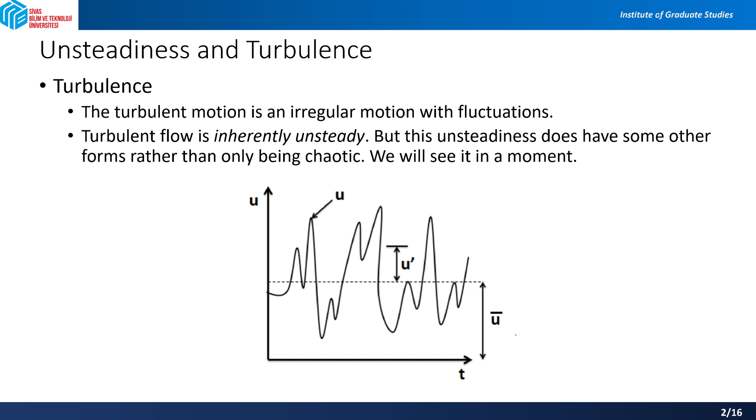So if I want to show it in a proper way, let's say this way, you remember that there was this experiment in Reynolds' laboratory back in the late 19th century, and he conducted experiments with pipe flow by feeding into the stream a thin thread of liquid dye. So this is a liquid dye with a different color.

And for low Reynolds numbers, the dye traced a straight line, like in here. This was a straight line, and it didn't disperse. And with increasing the velocity of the water inside, the dye thread got mixed in all directions, and the flowing fluid appeared to be uniformly colored in the downstream flow. So it started to mix, and then you will have a uniform color.

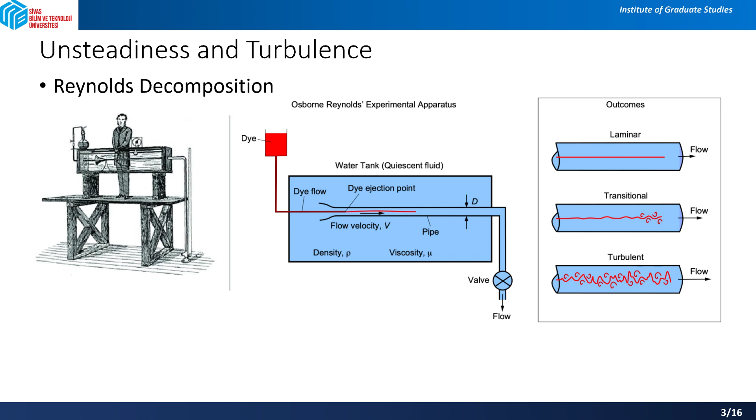And Reynolds inferred that on the main motion in the direction of the pipe axis, so in this direction, the x-axis, there exists a superimposed motion. Okay, this is very important for us because this superimposition will lead us to use the decomposition that we just mentioned there. So he inferred that there is this superimposed motion in x direction all along the main motion at right angles to it. So this superimposing is at the right angle.

So if the main flow is in x direction, you have the y and z direction normal to it. So you have this superimposition in those directions. This superimposed motion will cause the exchange of momentum in transverse direction, and the velocity distribution over the cross section is more uniform than in laminar flow.

That's why you remember in your fluid mechanics that if there is a profile of laminar flow, the fully developed flow like this, for a turbulent motion, the velocity distribution is more uniform, so you will end up with a much more uniform, let's say, turbulent profile. And this description of turbulent flow consists of superimposed streaming and fluctuating, or sometimes we call this fluctuating eddying motion.

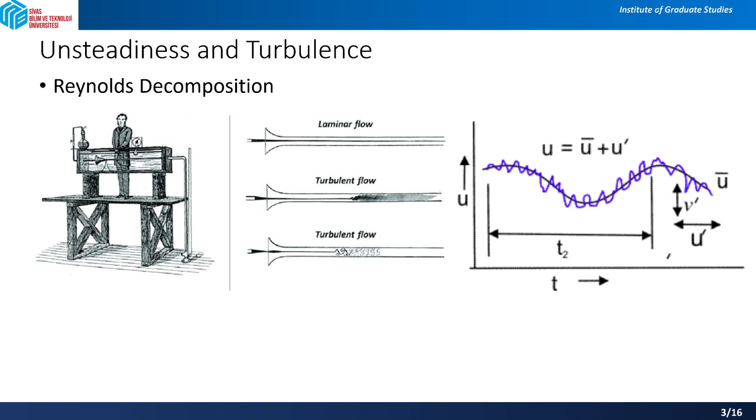So I guess you already remember these from your fluid mechanics and aerodynamics courses, but this is very important for us to see the Reynolds decomposition at first here, and then we will have a triple decomposition in turbomachinery in the next slides. And based on this, actually, what you ended up with was the Navier-Stokes equation. So what was the Navier-Stokes equation?

We said that we have some governing equations, and these governing equations are for your instantaneous velocity. See, this is your instantaneous velocity. So you have u here. So the governing equation for instantaneous velocity is the Navier-Stokes equation. As you know, the Navier-Stokes equation is governing velocity for any fluid flow.

But you do also remember that sometimes when you are engaged with modeling of these equations, you had to make some simplifications. So what are those simplifications? Those simplifications are coming from, as I said, the so-called Reynolds decomposition. So again, please keep in mind that these Navier-Stokes equations are there just to give you the values of instantaneous velocities like u, v, w in the x, y, z coordinate system, and also instantaneous pressure values at each point and at each instant of time, because we said that this is an instantaneous equation.

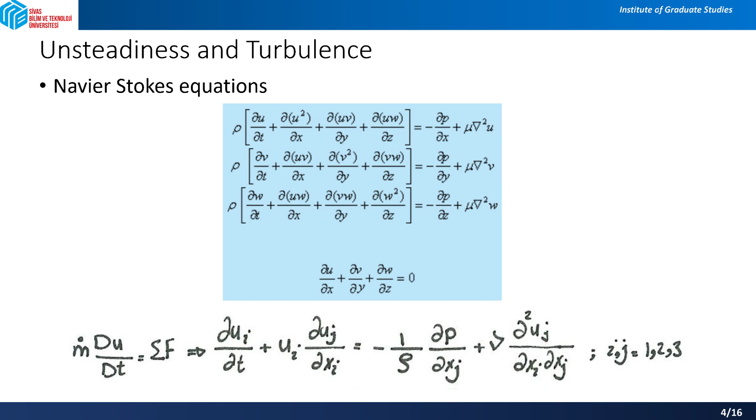And then you have it in a tensorial form. What is the tensorial form? It is pretty important for you to be able to write this Navier-Stokes equation in tensorial form. As in this previous slide, as you can see, the Navier-Stokes equations are three momentum equations and one continuity equation. So these are not written in tensorial form. The tensorial form is this form. So this form is much simpler, right?

We just wrote three lines of momentum equations in one line. This is one line. So what does it mean? We are using tensors i and j here. This is called a tensorial form or Einstein notation. Okay. So instead of i and j, you can put 1, 2, and 3, and then when you put 1, 2, and 3, you will end up with the so-called three momentum equations. And the continuity equation is there.

So the continuity equation in tensorial form, if I remember, is exactly duj over dxj is equal to 0, and j is equal to 1, 2, 3. So if you put j equal to 1, u1 means your u velocity, u2 means your v velocity, u3 means your w velocity, and correspondingly x1 is the x direction, x2 is the y direction, x3 is the z direction. This is just an explanation of how to write the tensorial form. The tensorial form for continuity, we said, is this one.

These additional terms need to be modeled, because these are not something where you can put the values directly inside the mean flow that you are analyzing right now. You are getting the mean flow behavior, but these are not something that you are getting from the mean flow. These are multiplications of, for example, two fluctuations of velocities that then get averaged.

That's why you cannot use these as direct information from the flow, but you have to model these. So modeling this stuff is the whole CFD that we are dealing with nowadays.

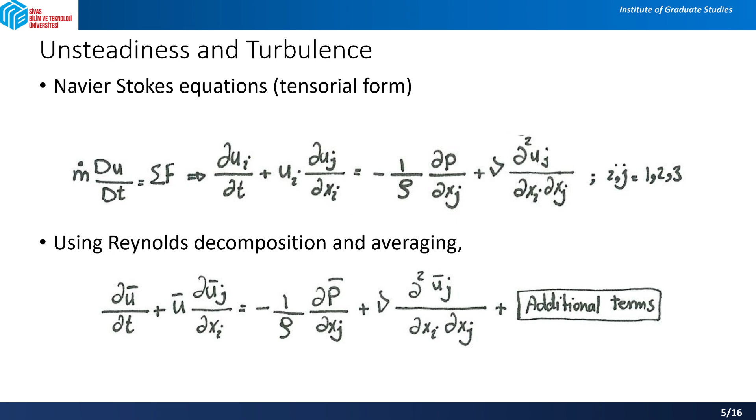We were talking about turbulence. We said turbulence is irregular flow. It is inherently unsteady. But let's look at the unsteadiness of flow inside a turbomachine. You know that a turbomachine is, for example, an axial compressor or an axial turbine or whatever. Whatever it is, it is rotating, right? So when it is rotating, it starts from somewhere.

So when one blade tip is at this point, after one revolution, you will have this tip at the same point. And after two revolutions, you will see it at this very first point. So it means that it is following a sinusoidal wave, right? And this sinusoidal wave in turbomachinery makes the flow unsteady for us. Because the flow is not just behaving like a normal chaotic turbulent flow. It is repeating itself as well.

When it is repeating itself, you can fit a sinusoidal wave to this repetition. And this sinusoidal wave has some characteristics which are known to you. For example, the amplitude of this sinusoidal wave is known to you, right? The period of this sinusoidal wave is known to you. This is a period. The wavelength is known to you.

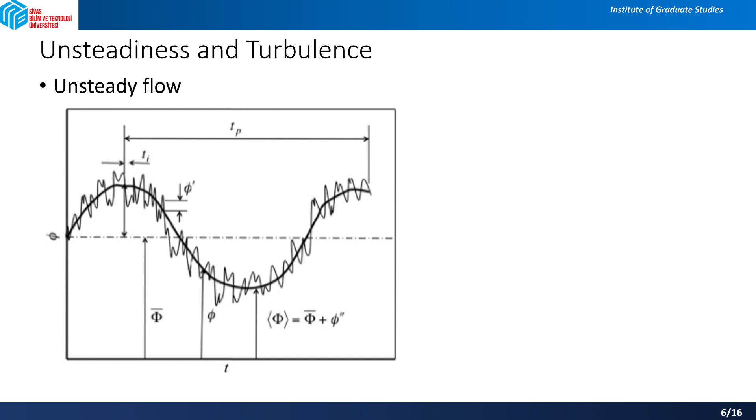For example, if you are measuring just the u velocity, just one component of velocity through time, how are you measuring it? You have, for example, a turbomachine, right? This is the side view of this turbomachine. The flow comes, this is rotating, and the flow goes away from this turbomachine. Suppose that you are putting some device in here, and this device can measure the u velocity for you. So this is you standing and holding this device, and you're measuring the u velocity like this.

What you're seeing is not a fully sinusoidal wave, but some fluctuations also exist over this sinusoidal wave. The same we did with the irregular and chaotic turbulent flow, you can do with this. So at any point, let's say this point, you have your u velocity, which is your instantaneous velocity, the velocity at that instant of time. The time instant is ti. At ti equal to some seconds, you are measuring your velocity with this device, and this is that velocity.

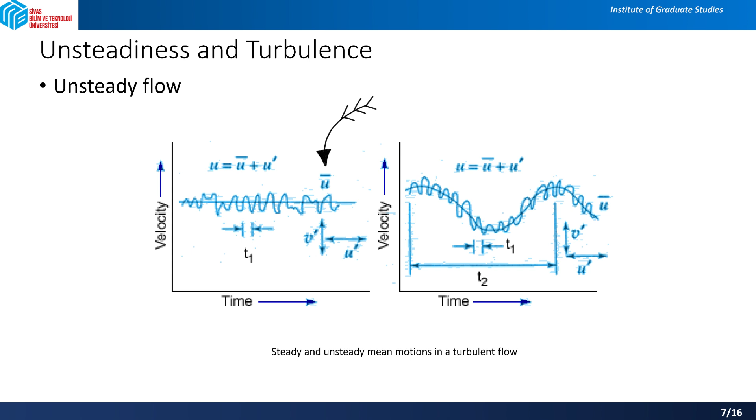So based on this, I can write my instantaneous value as my mean value plus some fluctuation. And my mean value is also composed of another mean plus another fluctuation, u double prime. This u double prime is what we call deterministic fluctuation. Why do I call it deterministic? Because we can determine the changes, as it follows a certain period or frequency. From here to here is one period. When you can fit it into a sinusoidal wave, it has a certain period, a certain frequency, a certain amplitude. That's why we call it deterministic. You can determine these values.

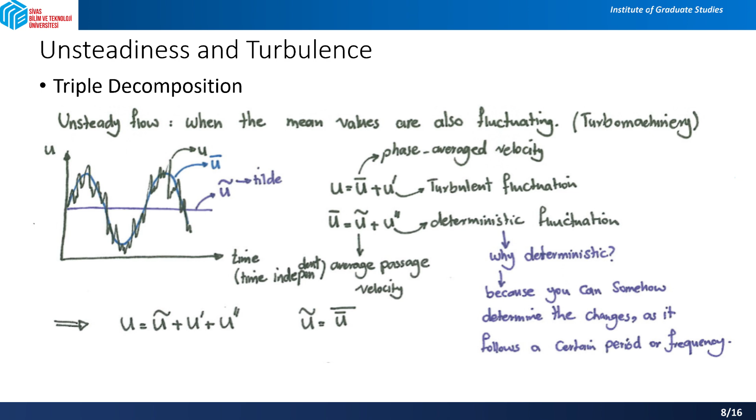So overall, your instantaneous velocity is u tilde plus u prime plus u double prime. So what is u tilde? You remember u tilde was the average of the average. The average of the sinusoidal wave will give you a completely horizontal value. This is better shown in here.

We said that because we have some non-linearity, we have extra unsteady stress terms. These extra unsteady terms are generated in flow equations when you do the time averaging. You do the time averaging over u prime and you get u tilde. These stress terms are similar to the Reynolds stress terms generated by turbulence, but in the cases of interest, they are generated by periodic unsteadiness in turbomachinery. These periodic unsteadinesses have a distinctive frequency, and that's why we call them deterministic stresses or deterministic fluctuations.

So in these two graphs, you're comparing normal turbulent flow that has the fluctuations u prime, and unsteady turbulent flow, which happens in turbomachinery. In the unsteady turbulent flow, the mean u bar, your mean velocity, also has another mean value, which is this one, and you call it u tilde. So that's how you end up with the triple decomposition.

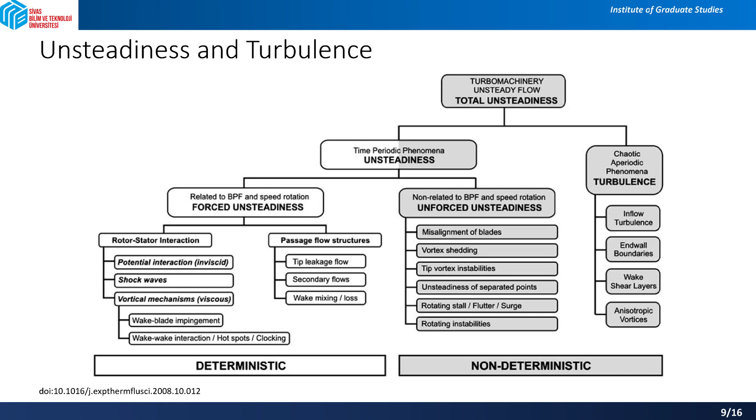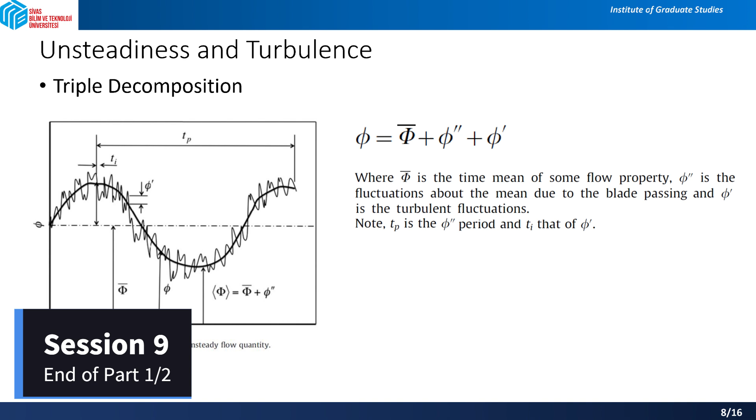In the previous slide we showed that u is u tilde plus u prime plus u double prime. So if you have phi as anything, phi could be u, v, w, or p, you can write phi equal to phi bar, which might be your tilde, plus prime and double prime. Because of these distinct values, we call it triple decomposition. Before, we had the Reynolds decomposition, which was easy: u equals u bar plus u prime, so it has two components. But here we have three components, and we call it triple decomposition.